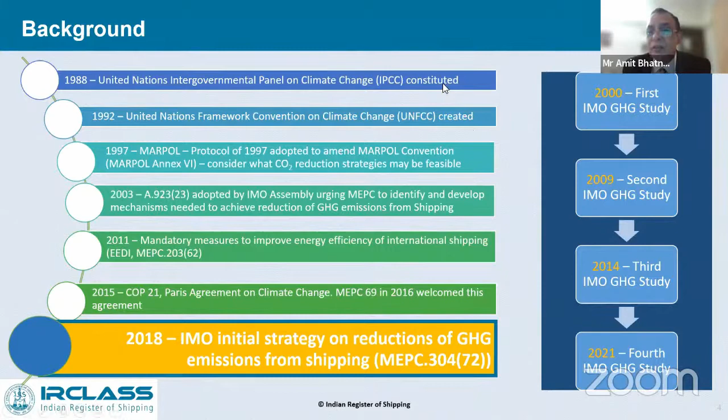So this is the journey, and I'll just go through what other speakers have already covered, so I need not revisit the whole thing once again. Now this is what is important.

So we have got greenhouse gases. Now here what is important is global warming potential, GWP. When we see the concentration, we have got water vapor, which contributes 36 to 72% and has got the highest concentration. Then we have got carbon dioxide, which has got 400 ppm and consists of 9 to 26%, and then we have got methane and ozone.

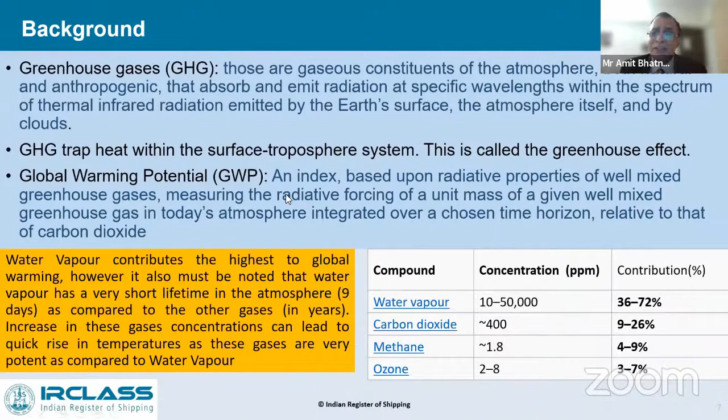Though water vapor has got the highest contribution, its life is very short because you get rains after that. So I think this major portion was already covered, so I will try and skip this. I just wanted to show that we have got CO2, nitric oxide, and methane, which has got high global warming potential.

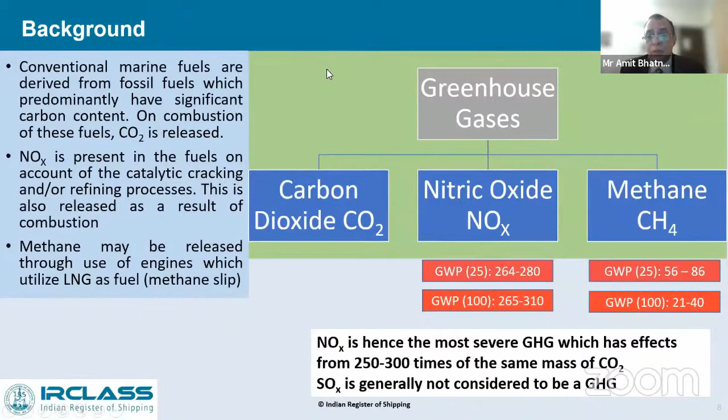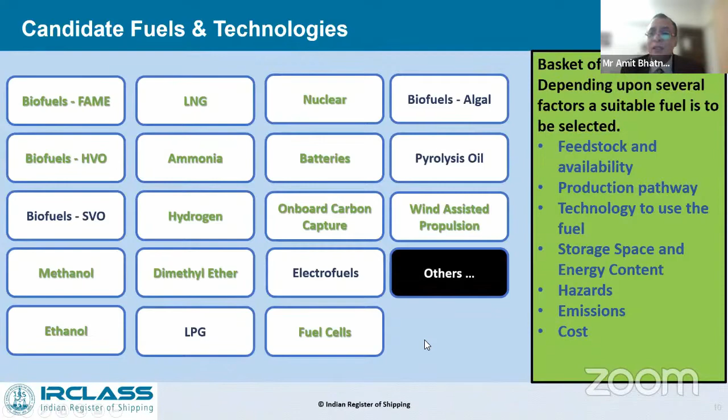Now these were a few fuels which I wanted to discuss, but my job has been reduced by Mr. A.K. Singh, so I will just move ahead from here. I'll quickly go through this, since it was already covered, so I'll be a little fast on this.

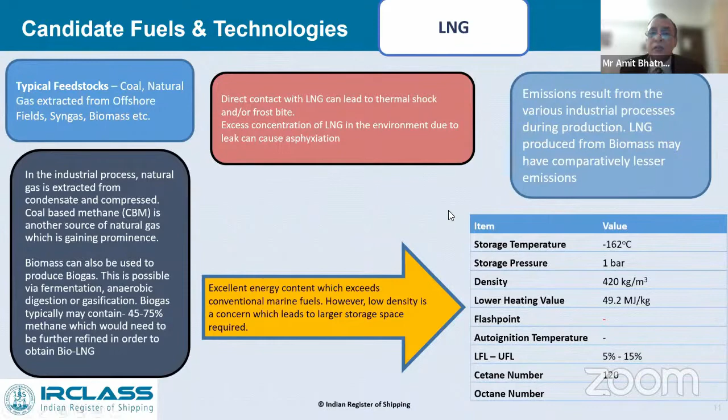As far as LNG is concerned, the storage temperature is well known - you've got minus 162, and then storage pressure. Now what is important to discuss here is this:

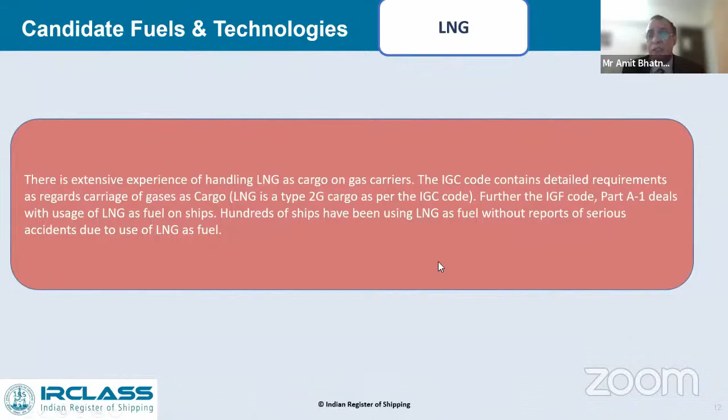there is an extensive experience of handling LNG, because LNG as cargo on gas carriers has been there for almost 50 years. Now IGC code contains detailed requirements as regards carriage of LNG as cargo. Further, IGF code part A-1 deals with use of LNG as fuel on board ship, and a large number of ships have been using this without any accident, though it is considered to be very unsafe in normal terms.

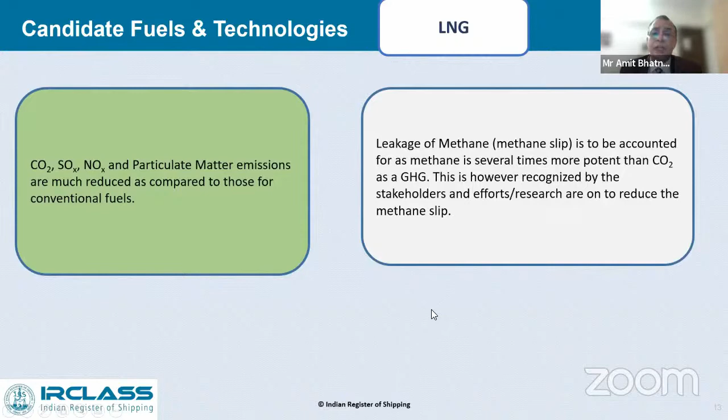So what happens? CO2, SOx, NOx, and particulate matter emissions are much reduced as compared to conventional fuel. However, as other speakers have also spoken about the methane slip, the technology is improving, so this methane slip will also over a period of time go away, or reduce to a larger extent.

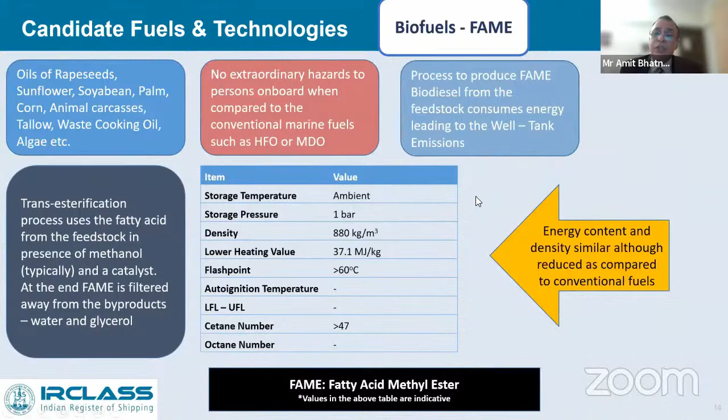Now, FAME also was discussed, so whatever has been discussed, I am not going to repeat it. I will just come towards what are the outcome of various technical discussions on FAME.

IRS has been proposing use of B20, that is 20% blending, and the permission of this 20% blending has to be obtained from statutory authority as per MARPOL Annex 6 requirement regulation 3. I am happy to share that my colleagues have been working on this, and the trial of B20 has been successfully completed on board ships of one of the shipping companies in India.

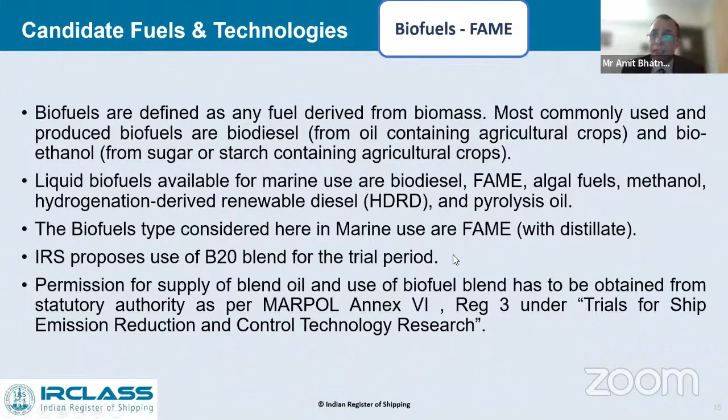So these are the guidelines which are available in terms of best practices for fuel oil suppliers for assuring the quality of delivery to these ships as per MEPC circular 875.

Now, what needs to be done for the bunker supplier is that the supplier has to register in accordance with MS Notice 3 of 2014, in accordance with MARPOL Annex 6 Regulation 3, and the base oil and diesel fuel has to be in accordance with ASTM standard D6751-08, that is the specification for blending of DM grade fuels.

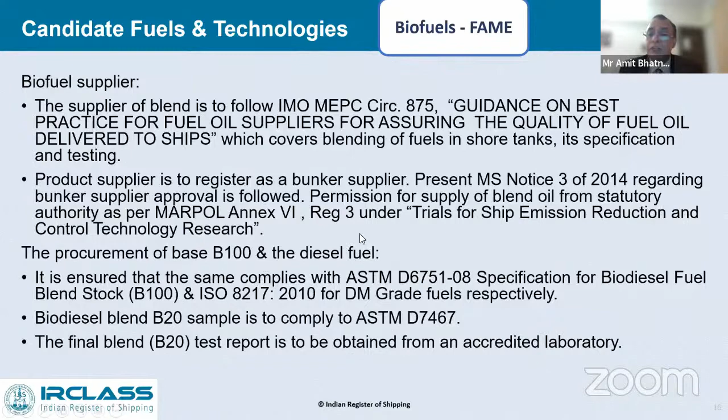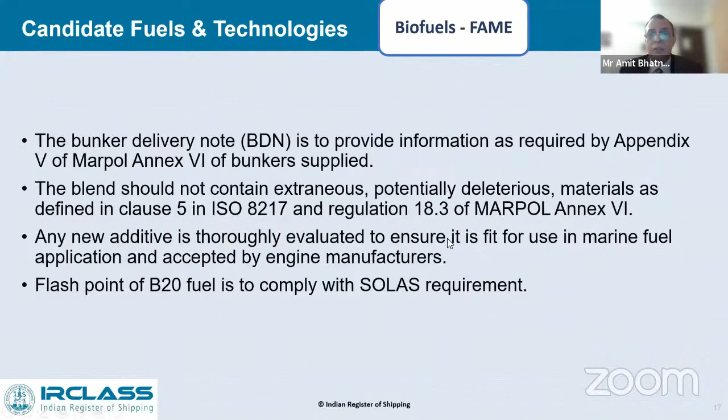And the test report of the sample, which has to be obtained from accredited laboratory, as being followed in terms of BDN on board. Another important factor is the flash point of B20 fuel is to comply with SOLAS requirement as well, that is required with respect to safety. I will not go deep into this, the slide is already there with you.

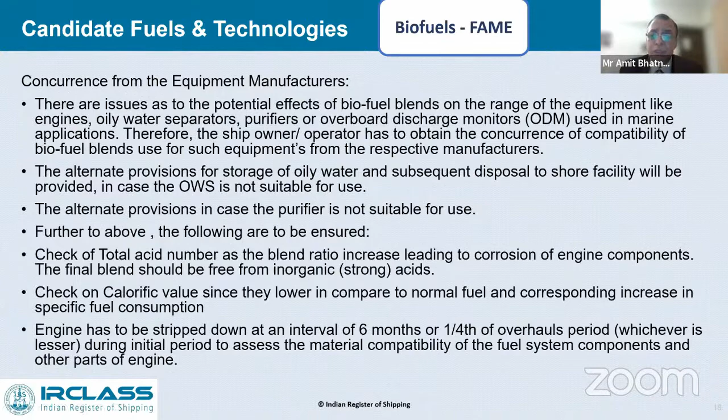The concurrence from engine manufacturer is extremely important, because the engine should first be able to perform to the required power, and then various purifiers, overboard discharges, ODMs, should also be compatible when we are using this type of fuel. And then the engine needs to be stripped down, at least for the initial days.

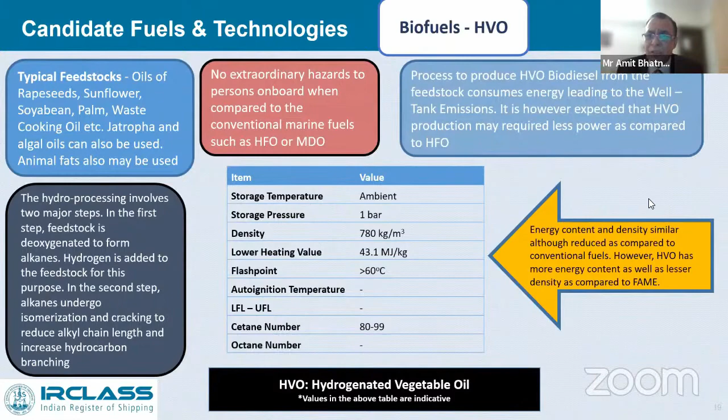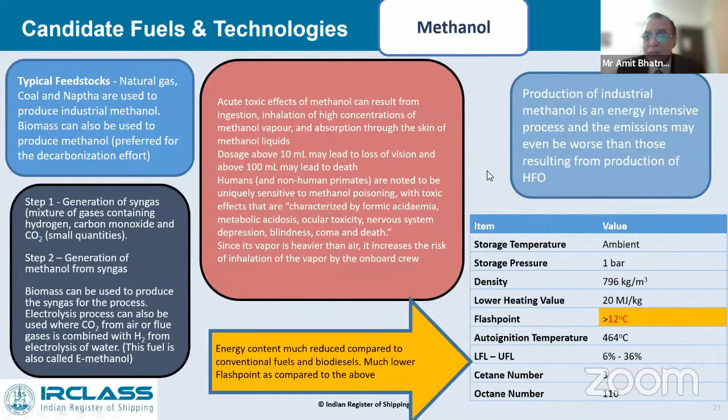Let me just quickly go through HVO, which I think is already covered, so I can go a little faster here. Methanol is very well covered too, so I'll go a little fast. As for methanol, as already stated, the SOx, NOx, and particulate matter emissions are much less for biomethanol. Here, the production methodology is also very important, because when green fuel is to be produced, the methods adopted to produce this fuel are also supposed to be green.

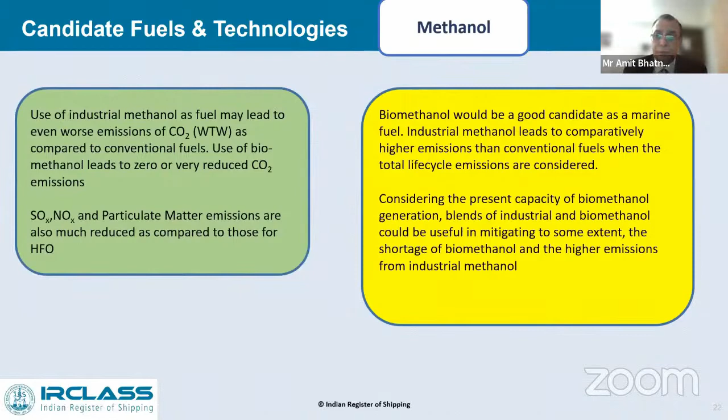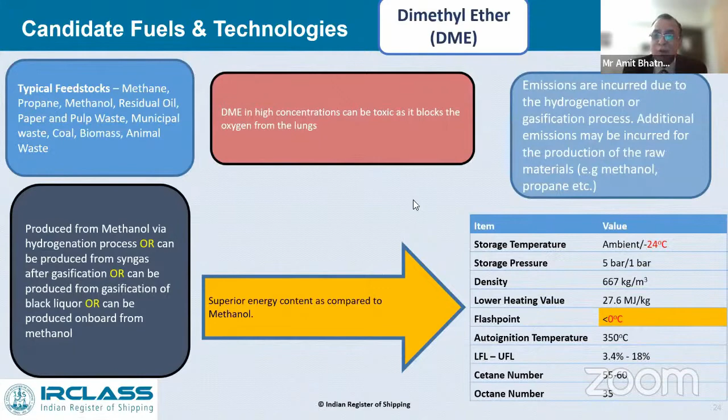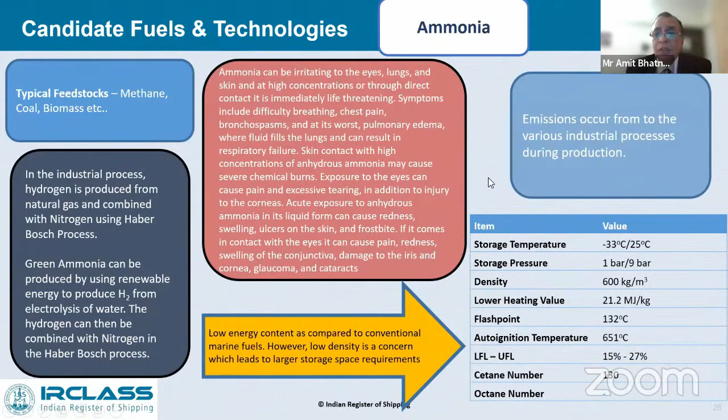Then we have methanol, already covered. DME, also already covered. Ammonia is likely to be a good candidate in future, however handling of ammonia, as already discussed, has got certain issues which need to be dealt with. Then we have hydrogen, which was also covered by Mr. Singh.

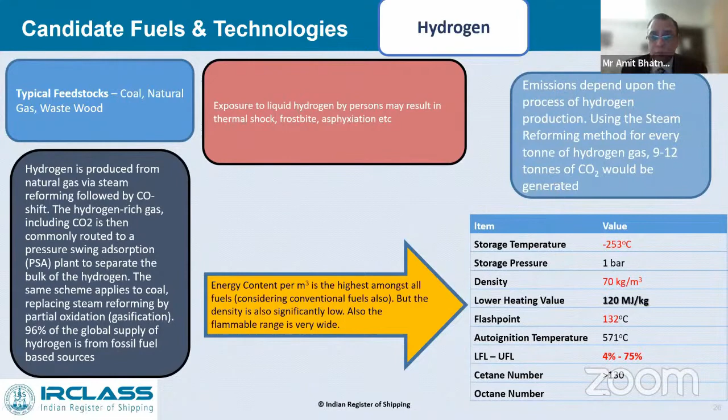Now, what measures can be used? There can be methodology of onboard carbon capture: installation of scrubber to capture CO2 from flue gases, installation of dedicated CO2 storage tank which would typically store liquefied CO2, and discharge of CO2 at receptor ports. This infrastructure needs to be developed. With onboard CO2 capture system, ships can continue to use conventional marine fuel, you don't have to shift to the new fuel. But installation of scrubber system will burden the existing engine room space, and power requirements will also be affected. Installation of dedicated CO2 tank would lead to sacrifice of further dead weight for existing ships, if it has to be done.

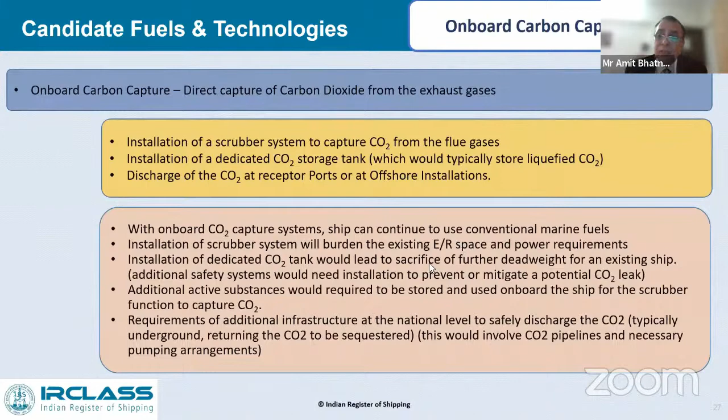And new ships, of course, the owner may not like to have such a system. Additional active substances would be required to be stored on board for the scrubber function to capture CO2, and there's a requirement of additional infrastructure at national level for safe discharge of CO2, which preferably has to be underground. So these are certain challenges with respect to onboard carbon capture.

Nuclear power ship is another possibility which navies have already been using, submarines, everyone is well aware about it. The concerns are with respect to design, installation, and operational costs, the leakage of radiation which we had seen at Chernobyl once upon a time and Fukushima reactors, disposal of waste fuel after being consumed, reactor protection for typical hazards such as collision, grounding etc., steel embrittlement, and what to do when decommissioning it.

Notwithstanding that, there would be advantages with respect to clean energy sources, because there will be no NOx, SOx produced, CO2 may be very little, a very low bunkering frequency, maybe every 5 years or so, so when you go in for special survey, just add the fuel at that time. Low storage space requirement for fuel, delivery of high rated power performance. Nuclear reactor on board ships have delivered power up to 170,000 kilowatt, which as of now no other fuel may be able to achieve.

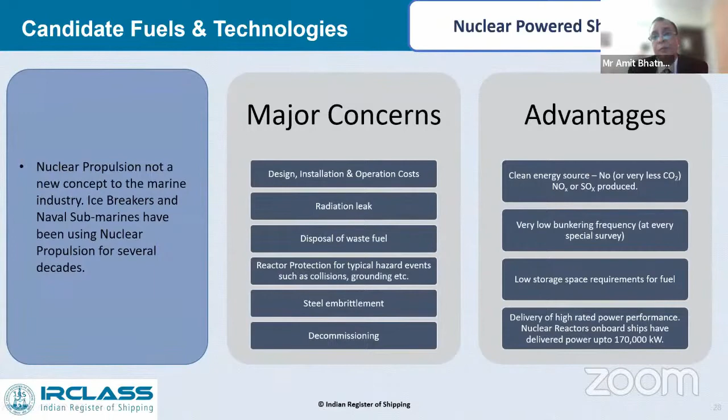Battery power ship - there was some question raised on this, so I wanted to share this news item. We have classed a hybrid catamaran, a battery powered ferry, first in a series of 23 vessels being built at Cochin Shipyard. It is designed for shore charging, certified to carry 100 passengers, and propelled by a hybrid electric propulsion system using lithium titanium oxide batteries.

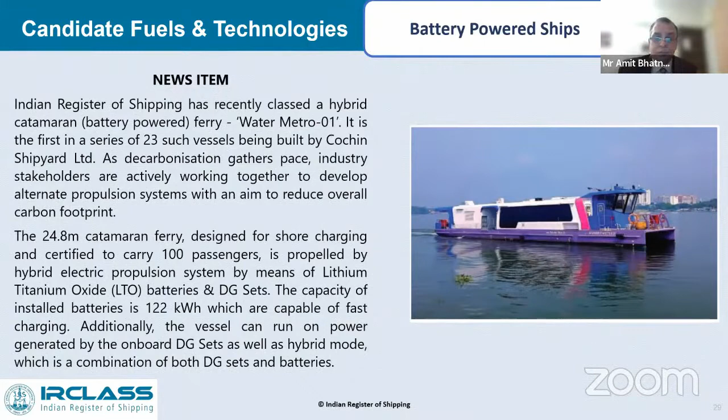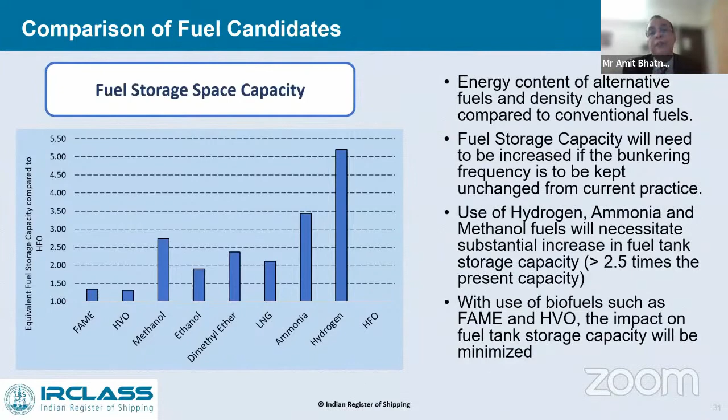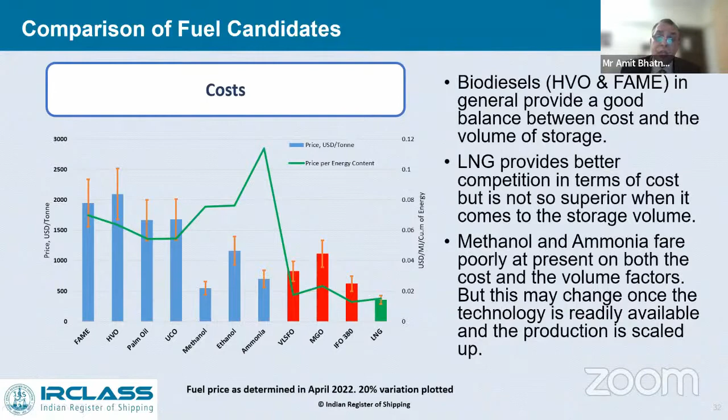So that means you have to sacrifice more of the cargo storage space on board. Now coming to cost, the least cost fuel at this moment is LNG, and ammonia happens to be the most expensive fuel. Same is the case for methanol or ethanol. But probably once the technology improves, we may have a situation whereby good candidates like methanol and ammonia have lesser cost.

Now, this is the CO2 emissions status under present circumstances. If you see here, FAME and HVO show potential for meeting the IMO GHG targets. You can see the IMO 2030 line shown there.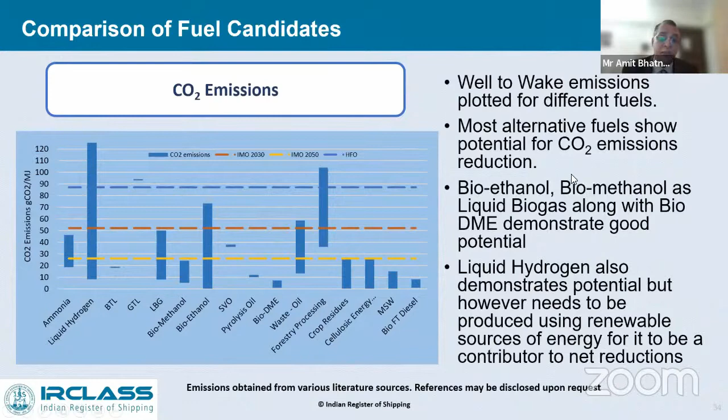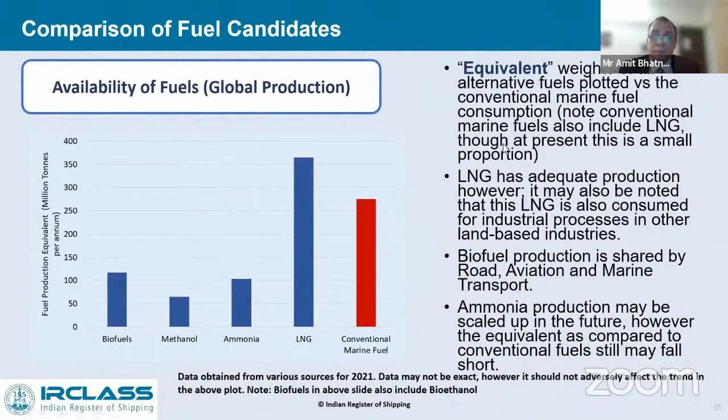Now, coming to the availability of these fuels - the equivalent weight of all alternate fuel plotted versus conventional marine fuel consumption. LNG has adequate production at this point in time, but it is also consumed for industrial purposes and other land-based industries. Biofuel production is shared by road, aviation, and marine transport as well. Ammonia production may be scaled up in future, but that will still fall short because presently the production is comparatively very less.

Now, there was some question about this. Present-day marine engines may be amenable to use blends of biofuel or even neat biofuels such as FAME, HVO, SVO, biodiesels, taking due precautions. Engines using LNG and methanol are available in the market and gaining prominence in the industry. Engines using ammonia as fuel are under development, expected to be commercially available from 2023 upon verification of successful testing, which is still in process. Marine engines using liquid hydrogen as fuel are in preliminary or pre-preliminary stage of development, so it is too early to comment.

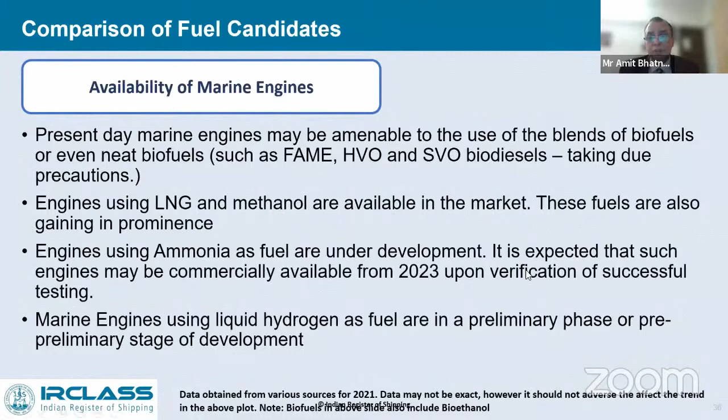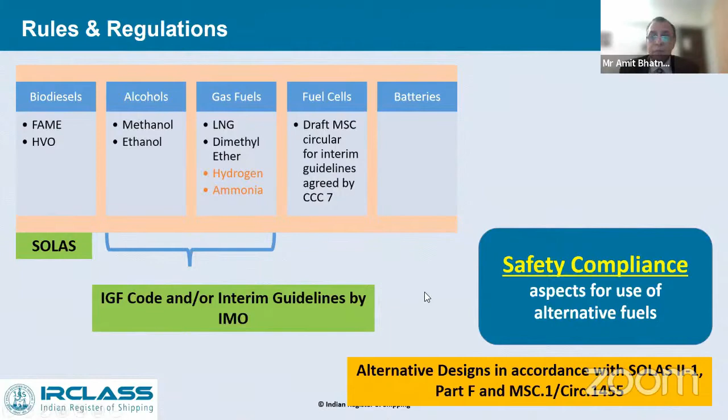Coming to rules and regulations, this is what I wanted to share with you. Biodiesel FAME has already been covered under SOLAS, and various alcohols, gas fuels, and fuel cells have been either covered in the IGF code or interim guidelines issued by IMO. This has already been developed by IRS and is available in the public domain - anyone wanting more information can download it from the IRS website.

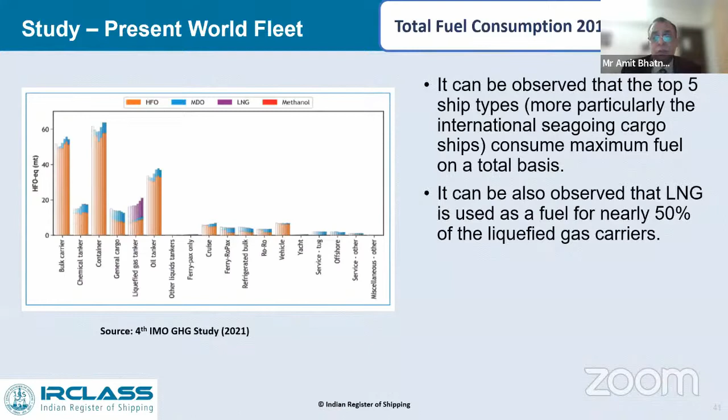Now, coming to the present fleet - the fuel consumption between 2012 and 2018. It can be observed that the top 5 types of international seagoing cargo ships consume maximum fuel on a total basis. Here you can see HFO, MDO, LNG, and methanol. It can be observed that LNG is used as fuel for nearly 50% of liquefied gas carriers.

Now, with respect to fuel used by consumer, you can see main engine, auxiliary engine, and boiler. The main engine is the main consumer of fuel for the top 5 ship types. For oil tankers and chemical tankers, the relative proportion of fuel consumed by the boiler is higher compared to other ships.

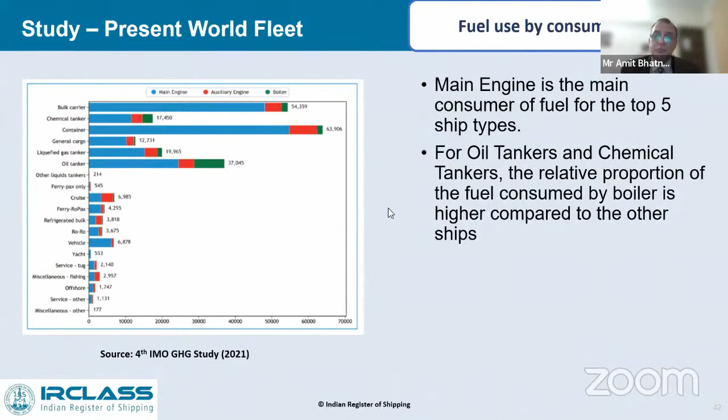Now, this is the present status of the present fleet which is operating. So we have got 14 ships using methanol as fuel. All of them happen to be chemical tankers. Then we have got 34 ships using LPG as fuel. These are more than 50,000 ton deadweight. Then 299 ships using battery propulsion or battery assisted propulsion, and 3 ships powered by hydrogen used within a fuel cell. And then we have got 1 icebreaker vessel, which is using nuclear fuel.

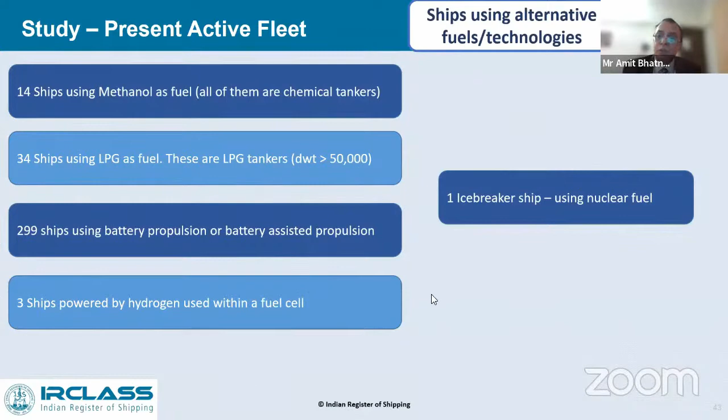Then we have got 675 ships fitted to use cold ironing, that is shore power. Shore power, even in India, is picking up. JNPT is the first port which is going ahead with installation of shore power, and as IRS, we are supporting that. Now here, 515 ships are container ships out of 675. Then we have got 357 ships using gas as primary fuel. This is excluding the gas carriers.

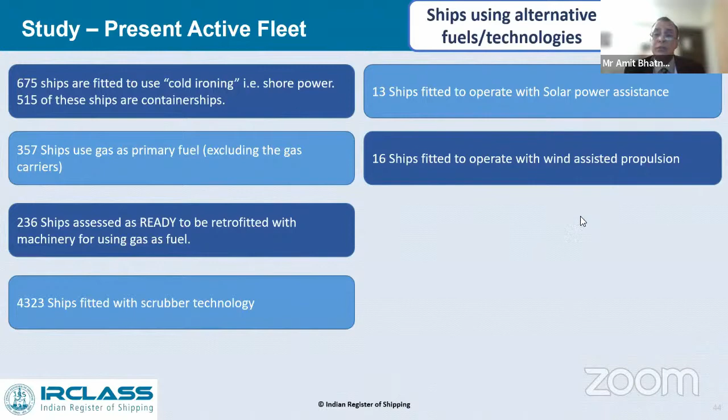And we got 236 ships assessed as ready to be retrofitted with machinery for using gas as fuel. And we have got 4,323 ships fitted with scrubber technology as per the data available today. And 13 ships fitted to operate with solar power assistance, and 16 ships fitted to operate with wind assisted propulsion.

Then we have got 138 ships that will be battery powered or battery power assisted. Then 51 ships will use shore power at berth. 651 ships to use gas as fuel: 91 container ships, 49 passenger ships, 58 oil tankers. And these figures I am explaining to you show that the world is moving much ahead of what we had been thinking. And there is a need for this awareness to be brought into the industry.

So 29 ships by methanol, 305 ships are being fitted with scrubbers here. This is 7 Ro-Ro ships with solar power technology, then 4 ships to use wind assisted propulsion, CO2 tankers, 2 of them are under construction, and then 4 of them are presently already in service.

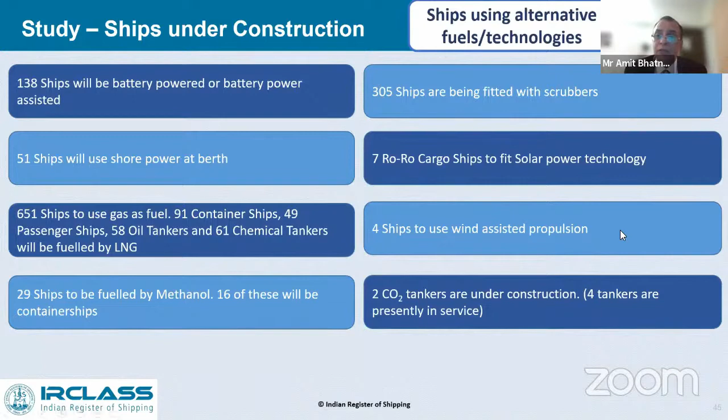Now this is what we talk about bunkering for ships which are under construction, that is biofuel, LNG, methanol, ethanol, ammonia, and experience is available for carriage of these as ship's fuel. For liquid hydrogen, some more study is required as of now, so it will take some time.

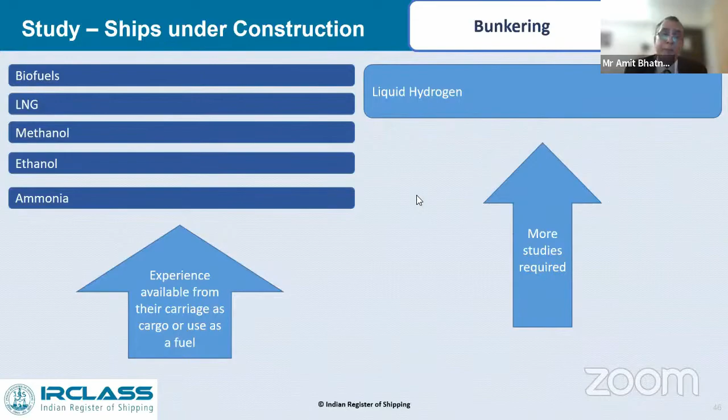With this, I would like to conclude with the following statements. Various candidates are available to support the IMO decarbonization drive. However, there is no single solution to the problem. Rather, several options need to be explored. Alternate fuel production, as of the present day, may not be sufficient to completely do away with conventional marine fuels. I'm talking about today's scenario.

Biofuels are excellent fuels which have less impact on the storage requirements, can be used in present marine engines, of course, with certain modifications and operational requirements that need to be addressed, and do not have significantly less energy content. However, substantially, these fuels are to be explored. Sustainability is to be explored further, and it may be noted that the land transport and aviation sector would also demand these fuels. So there would be a competition to use these fuels.

Onboard carbon capture may be a good interim solution. However, it will call for facilities at the port for reception of onboard generated CO2. Infrastructure for disposal of CO2 will also be necessary at that moment of time. It may be important to note that this is a problem which the marine industry may not be able to solve single-handedly, but would rather need efforts from all sectors. And it's heartening to see that the entire top of IEI is sitting today and contributing towards this cause.

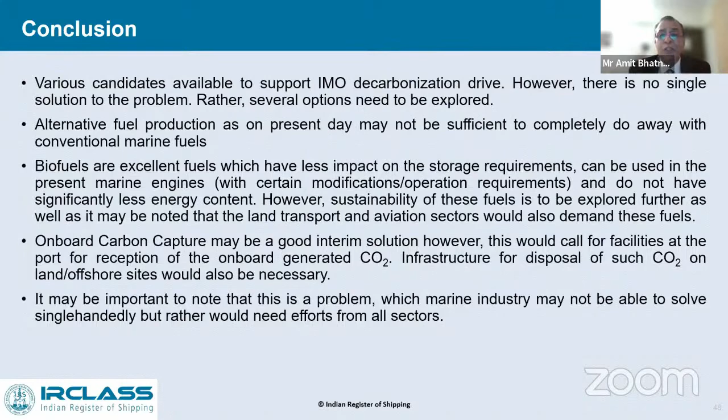LNG at present is the fuel which will help to reduce CO2 emissions to an extent, and its experience is also available as fuel on board. However, in the long run, options need to be explored to generate LNG from biomass in a viable manner. Availability of renewable power generation across the globe, along with carbon capture from industry plants on land, would play an important role in determining the emissions from the marine industry.

Ammonia appears to be a useful candidate as an alternate fuel. It will also depend upon the technology on board to use it in a combustion engine or as a fuel cell. That is yet to be seen. A host of biofuels developed from waste biomass are available in principle. However, their feasibility is to be checked as to whether their production can be scaled up efficiently, sustainably, and viably.

The age of the fleet, which is very important, is comparatively young. That is around 15 years or less. Thus, phasing out these ships from service has to be gradual. Use of biofuels or biofuel blends or LNG or onboard carbon capture may be useful to reduce GHG from these ships until a long-term sustainable candidate is established.

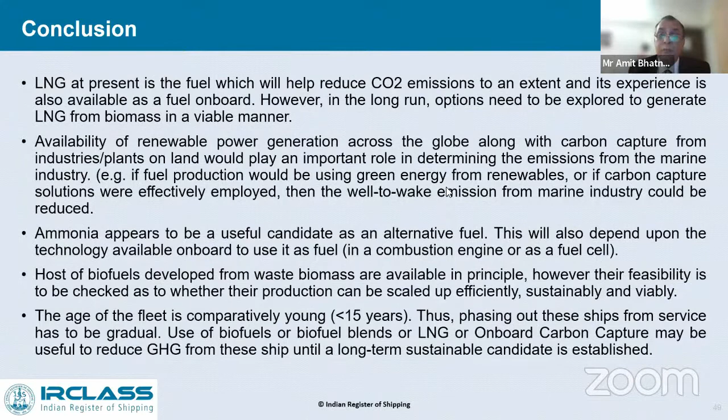In the end, I would say the bunkering frequency would be subject to change, considering options such as ammonia and hydrogen would need larger fuel storage tanks, as I have shown in the previous slides. It may be more important and more practical for ships to undergo more frequent bunkering rather than reserve large storage space on board. So for that, we require more bunkering ports, or bunkering ports in vicinity to each other.

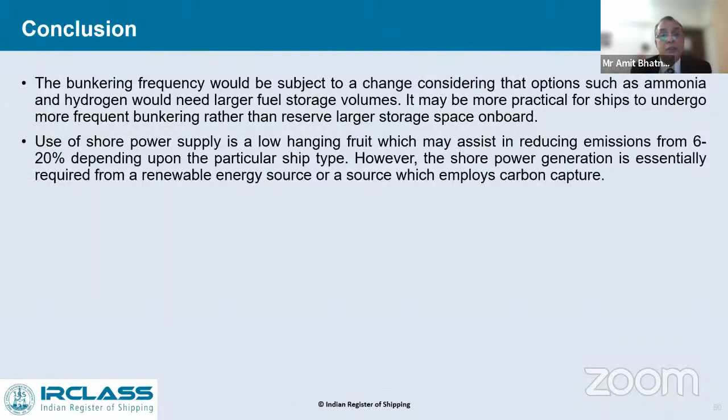The use of shore power supply is a low-hanging fruit, which may assist in reducing emissions from 6 to 20% depending upon the particular type of ship. However, the shore power generation is essentially required from a renewable energy source or a source which employs carbon capture.